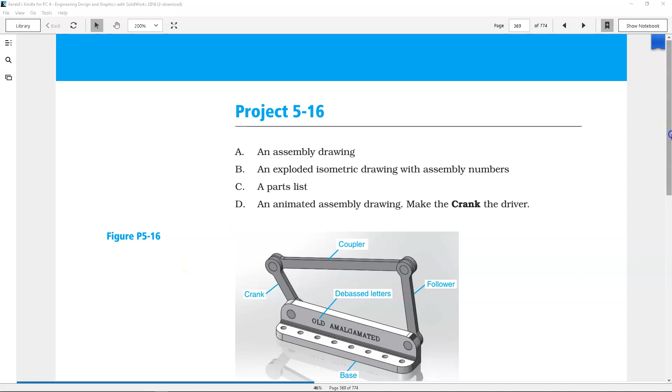Let's take a look at project 5-16, and when we look at the parts for this, we're going to start to develop some strategies. So when I look at these pieces, let's see if I can get my drawing tools up, and let's pick a color that's not red.

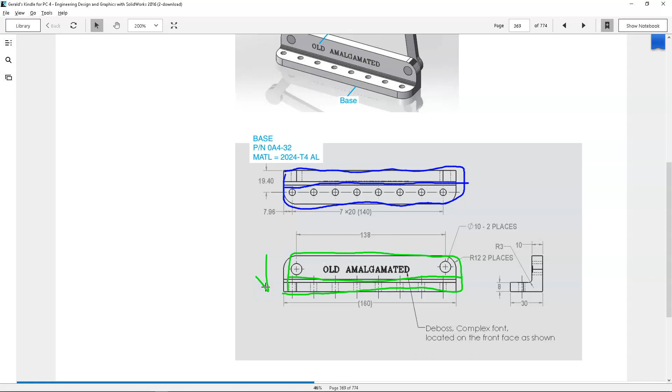When we look at these parts, we could draw this profile, and if we were in the 2D world, we would probably also include that line there for some division. Let's go to green, or we could draw around the front profile, and that could also include the division. And I forgot to mention, this one would probably be going this way, where this one we would be extruding that way. Right? And then I would say my preference in looking at this piece is that we would draw this L shape, and we would be able to get quite a bit of that geometry, and then we would be taking the extrusion this way.

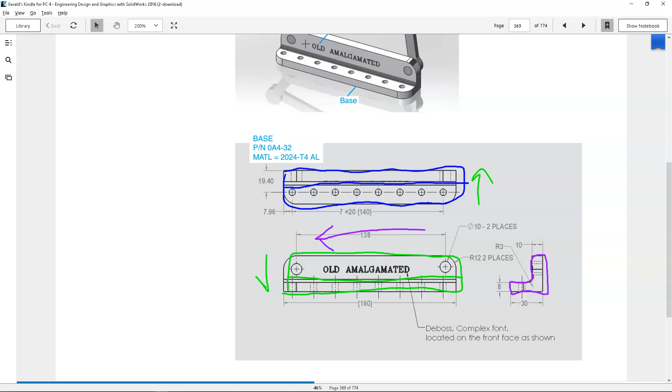Alright, so one of the things that I noticed when I'm looking at this is that we're missing a few dimensions, and I mentioned previously that one of the things I like about this book is that, let me go ahead and erase my existing scribble, it maybe missed some dimensions, or there are issues where you're going to have to make decisions. So there's an assumption that this 30, oh, I'm not freehanding, let's do it this way, this 30 also corresponds to that dimension.

Another notice is that we have a radius of 2 places, and this one looks a little bit bigger. And when we come across, oops, let's see if I can get it to draw that line. I don't know if it kicked off or... I turned it off. There we go. And if I bring that line across, we have a little bit of a difference.

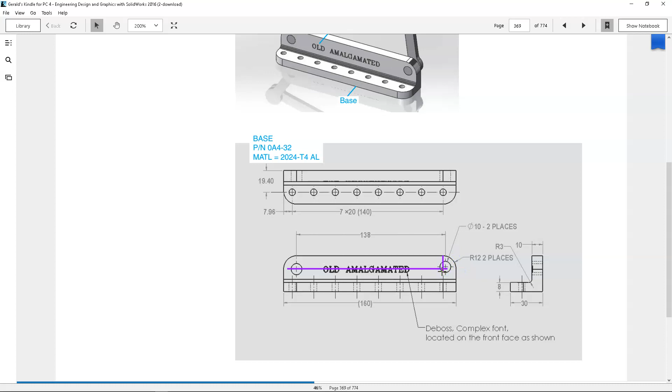So it almost looks like this radius is maybe 15 and this is 12, but obviously they're not on the same line. So we can assume that the radius of 12, oh, I'm still in the line command. Let me get back to freehand. That this radius is 12, this one being 15, that if these are at the center of those radiuses, then it comes back to our locating for our centers. Alright, so the drawing dimension typically has priority, and the other thing would be that it's not accounting for that radius and that radius if we are at 12. So radius of 12, probably 4 places.

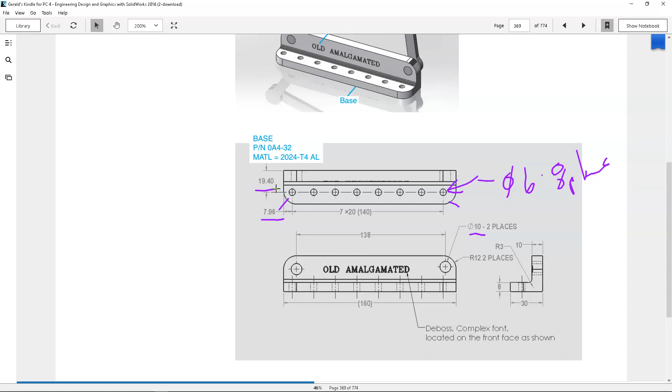The other thing is 7 times the spacing of 20, and we have 10, 2 places. Those look a little bit smaller, but we're going to go with the diameter of 10 in 2 places. Then that means that these guys aren't called out. So if I was guessing or having to make a decision, we're looking at a diameter of 6 and 8 places. And that's not looking too great, but you get the idea. Alright, and then for position, we have the 7.96, 19.40 off the back. We'll identify some of those just on our first look, and be able to address some of those issues as we go. So let me erase those.

And I need to get out of the draw real quick so I can zoom up to the next one. So those are going to be a Boss base extrude. We can see the exploded. Let's take a quick look at the follower. Alt, there we go, maybe. And let's find a different color for this one. I got a lag, there we go.

Alright, so they're saying the crank 50, follower 80, we're going to have 3 separate parts with our part numbers in our 2024 material. Probably not that common. 6061 is going to be the most readily available, with a 5052 or 7075 being after that. So we'll probably update that material to a 6061 T6 aluminum.

We have a diameter of 10 for the hole, and then a radius of 9 is going to put us at 18 on the diameter, and it helps just to kind of identify radius or diameter. Radius of 5 to blend, and then we'll want to make one of these, and so I don't have to reproduce all the geometry, we'll do a save as, and then change the dimension, and then save as to the coupler. All right, and then don't know that we'll do an introduction. Probably for the optional portion, we'll go into configurations where this will remain one part with 3 dimensions.

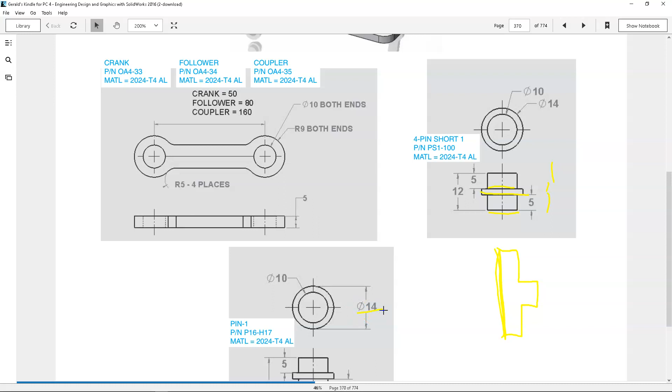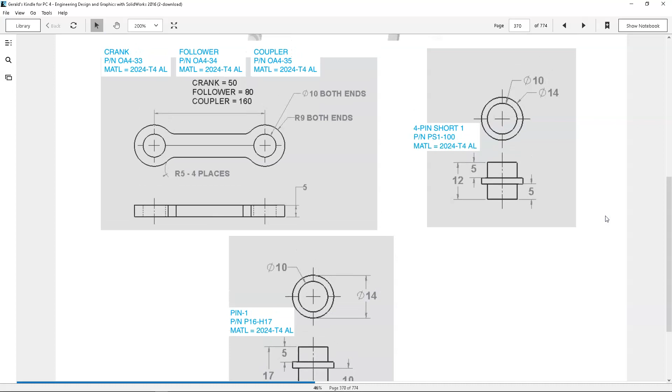And the same thing, since this is just a little bit bigger on the pin 1, we'll just do a save as, and the only dimension it looks like we're changing is the 12. So we'll do a quick check that we got all of the pieces. All right, so that goes into 17. So that looks like we have kind of a quick glance, see if we can identify any problems before they arise and we get into the actual design.

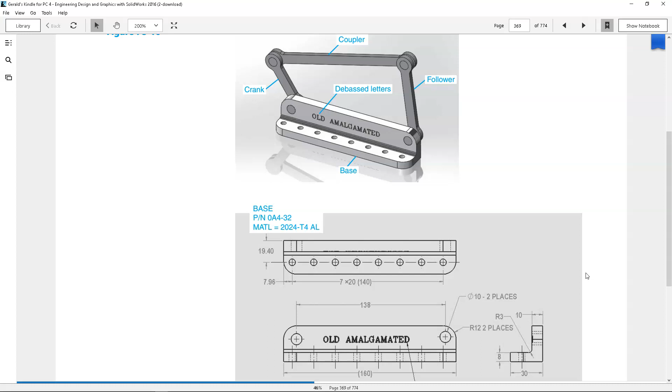And as far as old amalgamated, we'll probably put our name or something a little more descriptive. And I got a kick out of the debased or debast letters and the deboss. So we'll talk about picking fonts and putting letters into the sketch, and you can pretty much put what you want there. All right. So next step will be to get into the software and start with the design.